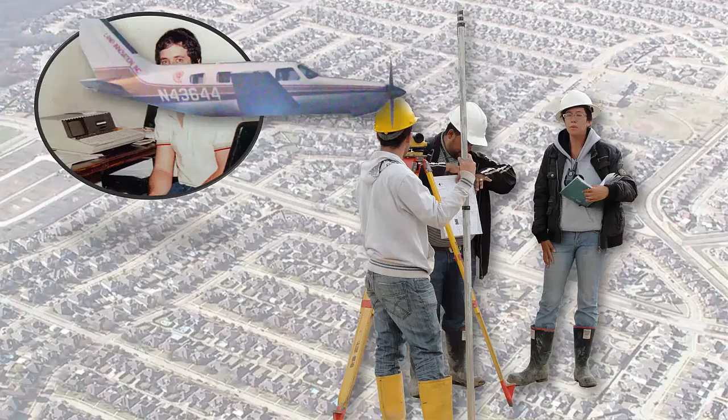Since the late 1970s, we developed software for the civil engineering and land development industry responsible for new growth and redevelopment. As we flew around the nation selling and servicing thousands of consulting firms, we could witness the sprawling subdivisions which were designed by CAD and our technology.

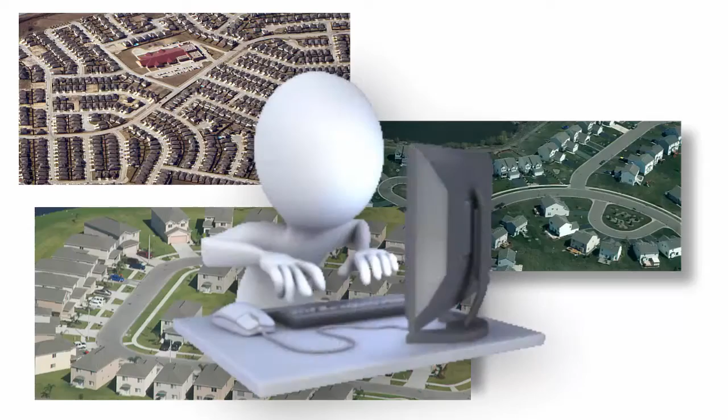It became obvious that a disturbing trend was happening. The pattern of development had gotten worse, not better, because of the repetitive, mindless software functions that replaced careful thought required for time-consuming, manual drafting of a neighborhood design. What would have taken weeks or months could now be done in just a few minutes.

These subdivisions were not disposable products, but unsustainable projects that would negatively affect the economics and living standards for a massive number of people for possibly centuries.

Over a quarter century ago, we formed a spin-off think tank to use the technology we pioneered to discover ways to solve problems of growth without sacrificing the values in space.

Experimentation led to our first discovery we coined coving, which separated the rigid relationship between home front and curb and instead developed a meandering space in the front yard where each home was set to create a curved pattern different than the alignment of the street.

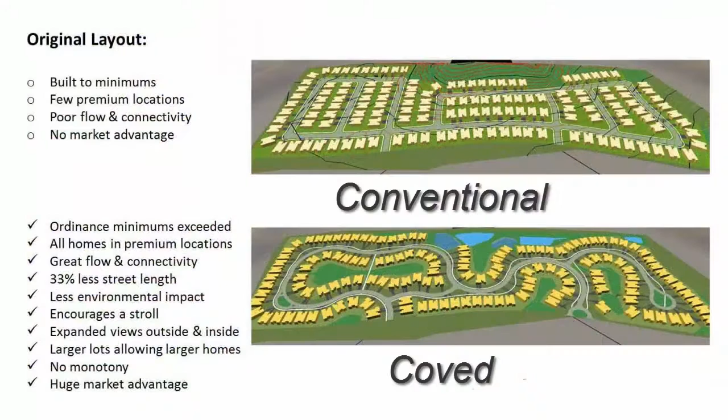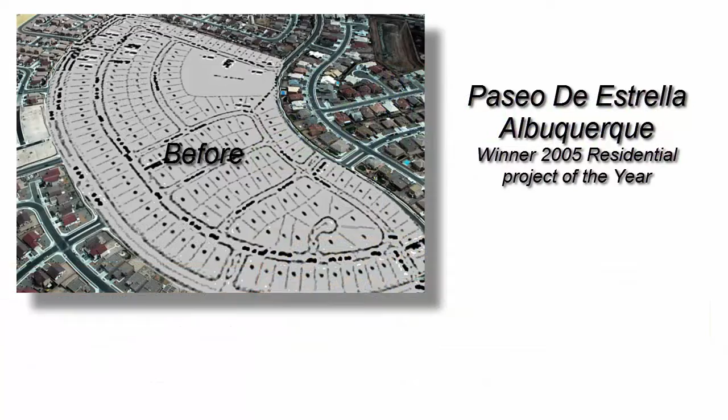By stretching the front setback line and developing flowing street patterns, we could significantly reduce the length of a street by a demonstrated average of 25% without a density loss, using the very same regulatory minimums of standard suburban design.

Instead of walking to a park 5 or 10 minutes away, the street took on a park-like setting, enhancing curb appeal and related home values, as well as significantly increasing average lot size.

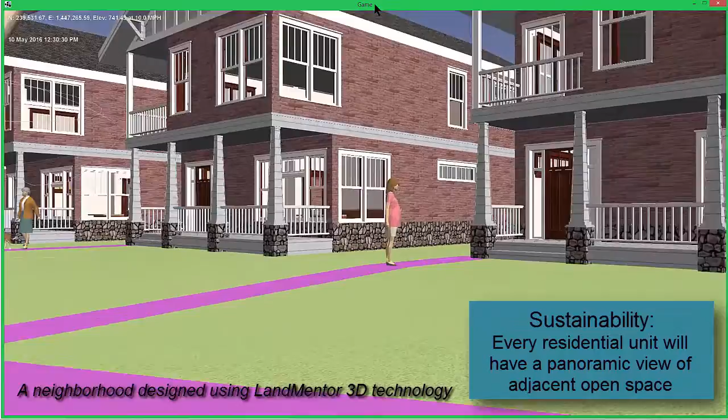By the late 1990s, we introduced the Bay Home, which was the first merging of architecture and planning, where living spaces within the home blended with open spaces around it by creating panoramic views in a village-like setting.

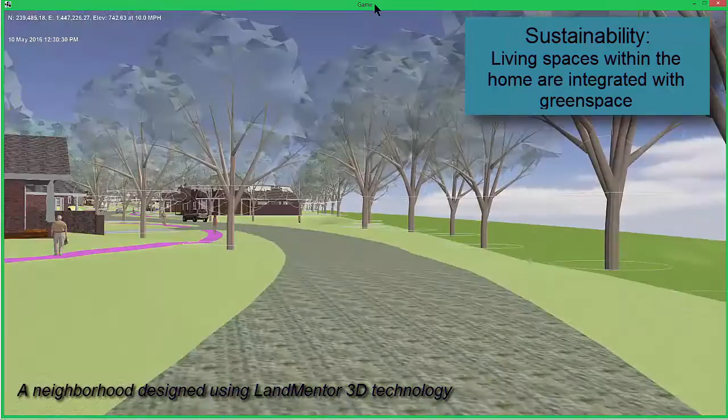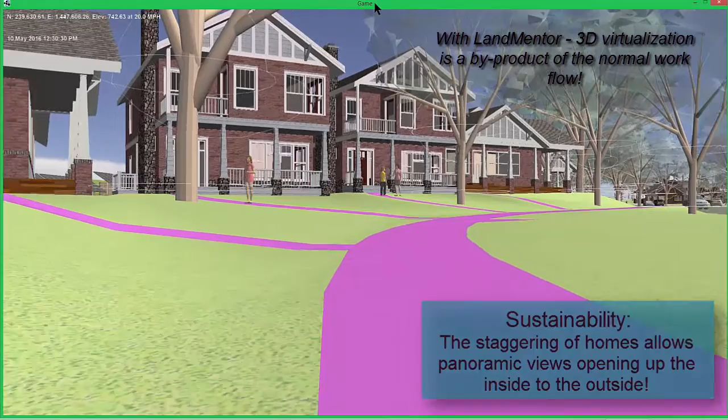Unlike coving, where homes are set as an art form, Bay homes are carefully staggered to provide a panoramic view and intended as a more viable alternative to townhomes, twin homes, and the rigid new urbanist patterns.

We then looked at the zoning patterns. The transitional patterns common to the suburbs place the highest density and cheapest products along arterial streets and other bad locations, resulting in lower overall value.

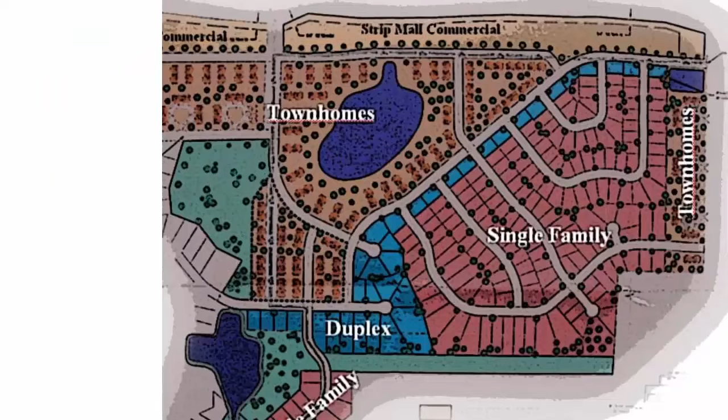Somehow placing a cheap product up front and the most population in the worst places seemed normal. We began to reverse this tradition by placing better products in the perimeters and place everyone, regardless of social strata, in better locations. We coined this new land use relationship CND, or Connective Neighborhood Design.

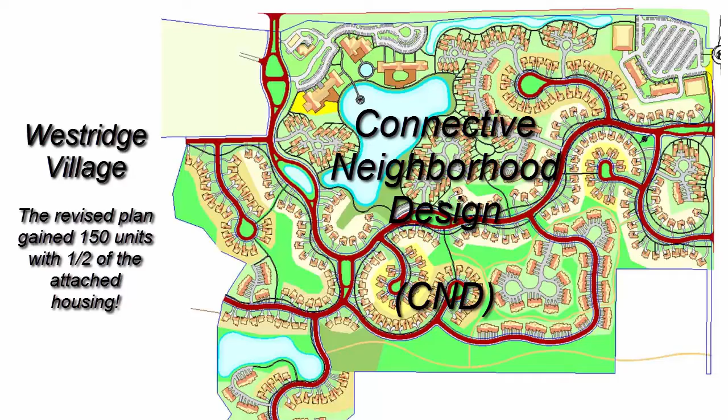We also standardized on wider, meandering walks set in easements as they extend beyond the right-of-way. This attention to geometric detail would not just beautify any neighborhood, but has significant safety advantages when pedestrians intermix with vehicular traffic.

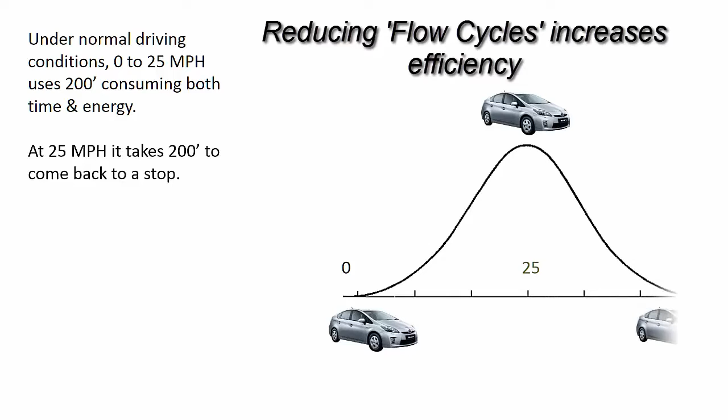As we continued research in how vehicular and pedestrian systems could be improved, we developed a science in neighborhood street patterns that minimize the number of accelerate, stop situations, or flow cycles, to reduce both time and energy in transit.

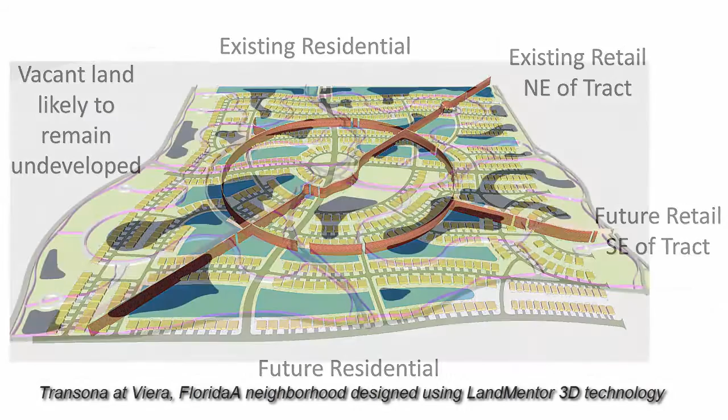For pedestrians, we developed a systematic approach to design, the main trails being the first step in a process to assure all growth was truly walkable.

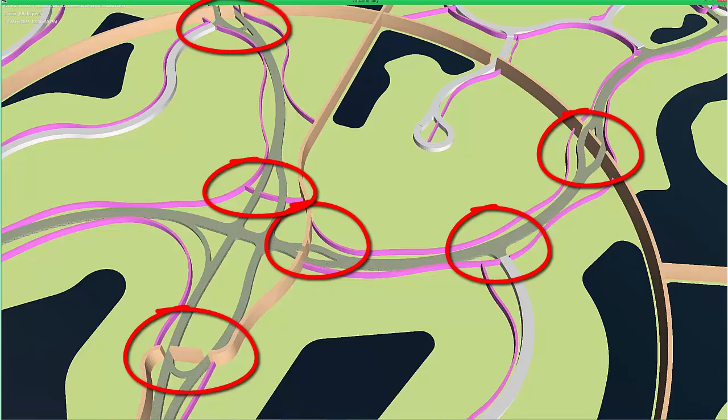As conflicts increased between pedestrians and vehicles, new innovations in design were created to enhance vehicular flow while simultaneously increasing pedestrian safety. Our diffusers are a far better solution for pedestrians than intrusive and potentially dangerous traffic circles and roundabouts. Diffusers have an additional benefit as creating unique entrances and senses of place.

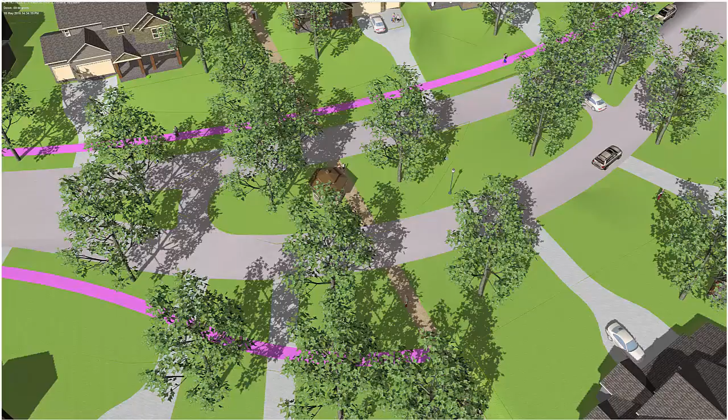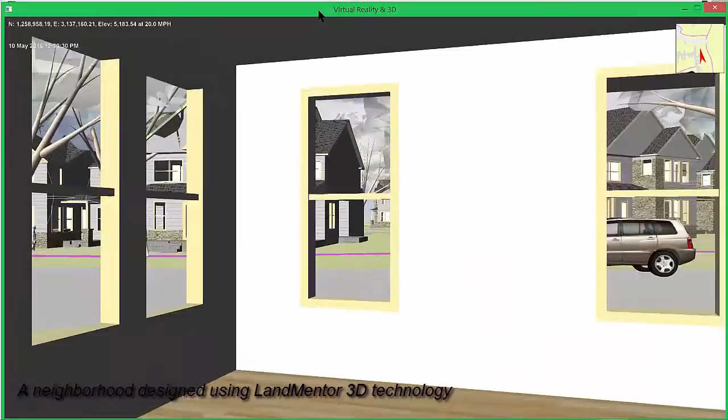We used the proven experiences of merging architecture and planning with the Bay homes and began developing new designs where every home, single family and attached, at all income levels, would have the significant advantages.

More recently, by merging architecture and cove patterns, we enhanced the efficiency, living standards, and value of single-family and duplex units on platted lots using a method we call architectural shaping.

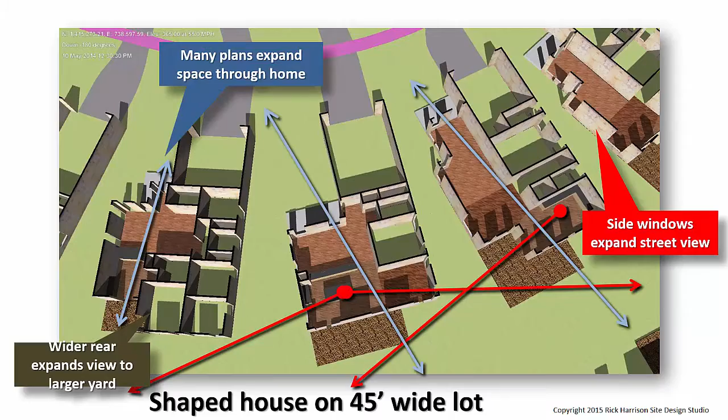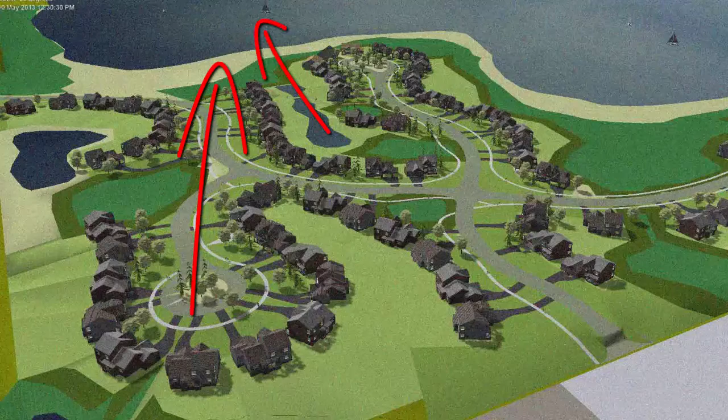To increase premium views, we routinely pull away from site amenities, called pullback. What this does is double or triple the number of premium locations compared to conventional subdividing.

The current regulatory systems in place are seriously flawed, either encouraging most minimal development or making regulatory demands too restrictive and complex, so that land developments become a paint by numbers, preventing the masterpieces.

The research we have done in this area will lead to a new generation of city regulations that encourage and reward better submittals without being cumbersome and overly complex.

All of these discoveries were in conjunction with developing new educational systems and new technologies that will extend beyond our doors to every city, consultant, and school worldwide.

We believe that within a decade, we can disrupt the entire land development and building industry with a new age of solutions that will bring design, attention to detail, and thought back into the growth of our world.

LandMentor allows you to be at the forefront of change.